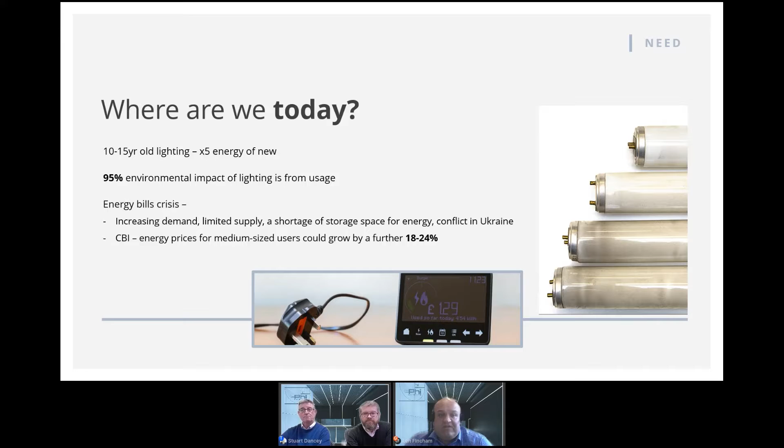Even those companies who are large enough or fortunate enough to have bought forward their energy are now beginning to see massive increases in their costs. According to a recent CBI report, energy prices could be set to grow by a further 18 to 24% in the next 5 years.

Another major change in the lighting market happened in the spring of this year. The EU Commission revised the handling of mercury-containing lamps. Mercury is considered a hazardous substance, and its use in electrical or electronic equipment is being prohibited. By the end of 2023, the production of T5 and T8 fluorescent lamps will be outlawed, meaning that the lamps for millions of luminaires across the UK, mostly in commercial premises, will no longer be manufactured, and the light fittings will soon become obsolete in their current form.

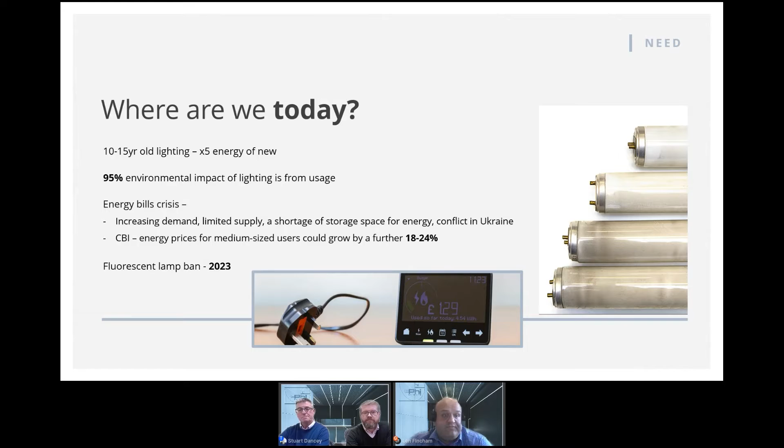For all the reasons mentioned in the previous slides, lighting offers a key opportunity for businesses to save money. But also, a further need to change is the desire of customers and staff to make greater strides towards sustainability and greater overall efficiency. The growing focus on climate change has led to stricter government regulations and legislation, with responsible companies taking a closer look at the impact their actions are having on the environment.

However, many organisations claim they are committed to operating in a sustainable manner for the betterment of the communities in which they operate, or use such statements as, 'We use sustainably sourced materials.' However, with the broadening reach of social media and the scrutiny that can easily be levelled by any number of ecologically minded watchdog groups, it is increasingly critical that such promises amount to more than just words on paper.

Design teams need to be incentivised not just to specify low carbon materials, but to identify and design holistically an overall low carbon solution. The UK government has enshrined in law new targets to slash emissions by 78% by 2035 and to achieve net zero by 2050. Demand drivers such as these, and the UK government imposing requirements to demonstrate the embodied carbon of their buildings, are already encouraging the building industry to move to the next level.

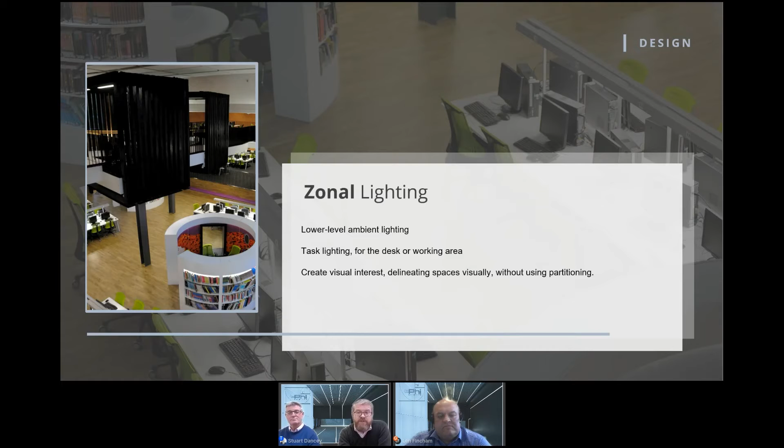Spaces can further be defined through creative choice, such as the fitting aesthetic, the finish colour of luminaires to denote areas or zones, or through correlated colour temperature, actually using the colour of light to delineate spaces.

If, however, the project is still at a Cat A stage, and we can't always get away from this, it doesn't allow lighting design to maximise all the potential benefits we've discussed. In this scenario, the best approach is to design using a fitting with modularity at its core that will allow future adjustments to optics, gear trays, and layout configurations with minimal impact both in costs and luminaire replacement.

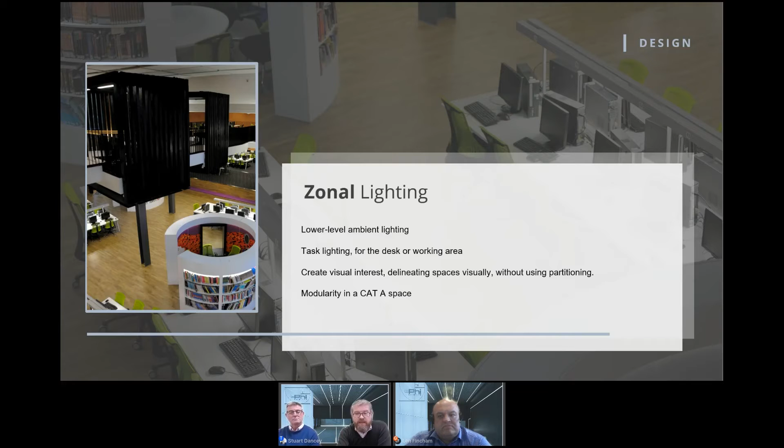We've all experienced poor lighting design. However, inadequate lighting can have negative well-being consequences, extending past just eye strain and headaches. More studies are linking the negative side effects of poor lighting with issues such as depression, anxiety, seasonal affective disorder, as well as reducing the quality of occupant sleep and contributing towards obesity.

We expect to see an increase in the adoption of lighting for employee well-being. Tunable white fittings allow for colour temperature and intensity of light to be adjusted throughout the day to support natural circadian rhythms of the occupants within the space.

Supporting natural rhythms will help improve sleep cycles and will help employees' overall health and immune systems. In turn, a healthier workforce helps reduce sickness and absenteeism and improve overall productivity.

Task lighting can help lower power densities, energy and carbon. However, when linked to smart control systems or via local sensors and switches, we have the opportunity to make the lighting user configurable for added control and local visual comfort.

The control of the colour temperature, direction, and volume of light can all be easily altered from one user to the next to accommodate individual preference. Seeing should be effortless and intuitive, and we all have personal acuity preferences that no specification can truly cover.

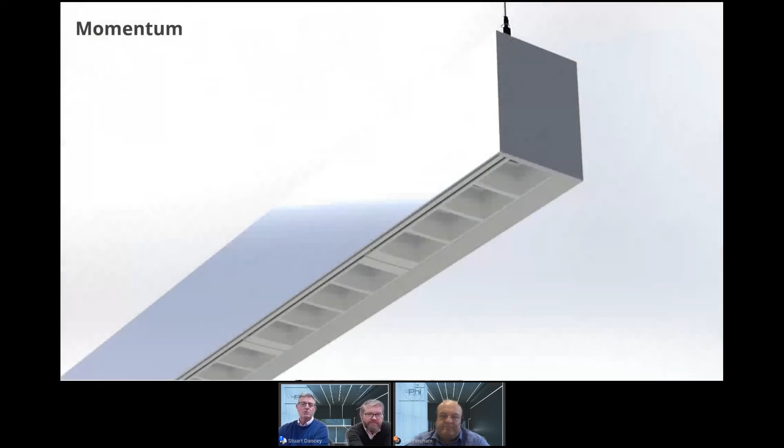The lighting system incorporated at OGW is Phi's linear extruded Momentum, which has a strong story to tell in terms of efficiency, modularity, and sustainability.

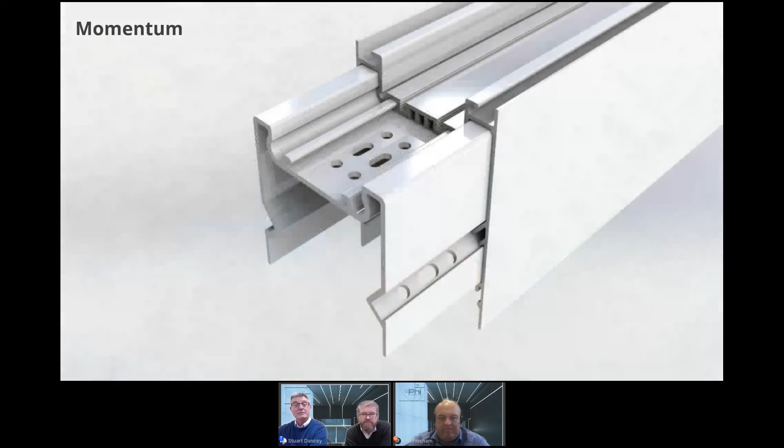This advanced solution is highly adaptable to project requirements, significantly exceeding current performance guidance. Even so, space usage can change, for example in the short term due to Cat B fit out, and in the long term due to occupier business evolution, both of which can cause the lighting to fall out of step with requirements.

In these situations, refurbishment stasis can be caused by the high capital expenditure of complete replacement, time and disruption. But by designing a modular system, we aim to provide future flexibility, allowing the lighting to quickly, easily and less expensively evolve as the space changes.

The outer housing remains consistent and enduring, allowing for modular gear trays, carrier optics, blank infill sections and integrated sensors to be configured to suit the project requirement or later replaced to enable adoption of future technology.

Striving to use the most efficient LED light sources will maximise the lumen efficacy of the fitting, reducing overall fitting wattage and lighting power density, thus reducing energy bills and carbon footprints.

A clear optical carrier system allows a wide array of technical optical materials to be incorporated or later swapped to meet specification requirements. These include opal, microprismatic, CDP or pocket optic solutions.

As an extruded and die-cast aluminium system, end-of-life recycling ensures minimal material waste reaches the landfill.

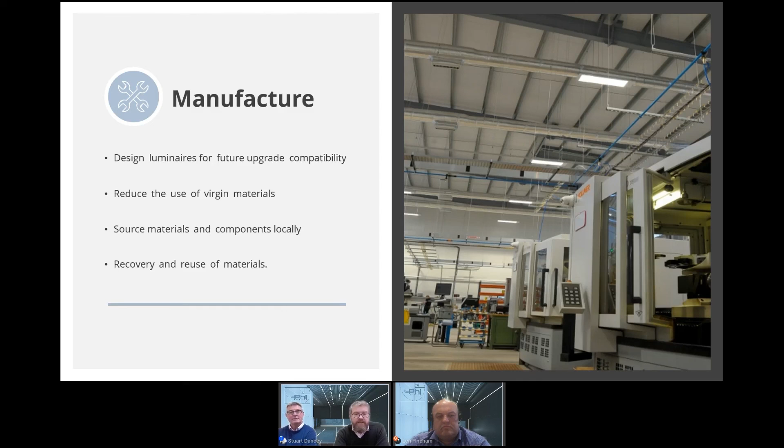Fittings will be manufactured with a higher percentage of recycled materials, reducing the use of virgin materials and single-use components. With time, there will be an industry shift to source materials and components locally to reduce embodied carbon within fittings wherever possible. And finally, there'll be a recovery, reuse, and redistribution phase of previously recovered materials or components to be repurposed into new fittings.

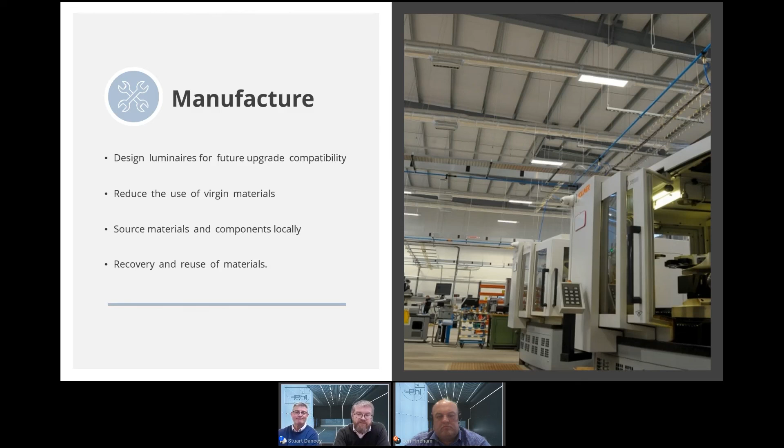During the service life of fittings, the focus moves to maintenance. LED fittings require minimal maintenance compared to traditional lamp technologies, excluding emergency battery replacements. Assuming the first components to fail will be the capacitors within a driver, this gives a mean time between failure of circa 50,000 hours, and a fitting service life between 5 to 10 years depending on operating hours. Benefits of fewer engineer visits and workplace disruptions are clear to see.

Unexpected failures do occur, and fittings engineered for easy assembly and disassembly reduce the time required to perform maintenance tasks. The use of quality branded components offers assurance, extending service life, but at an increased cost. It also ensures component availability or succession, so maintenance can be undertaken at a later date. Benefits from extended warranties are possible to cover the performance of products supplied in their reuse phase.

And at the end of service life, or when the space has changed its use, LED fittings can be refurbished or upcycled. Rather than disposing of fittings, reverse logistic networks will be called upon for the recovery of fittings back to the manufacturer or operational centre to undertake the refurbishment. Fittings will undergo repair and refurbishment, upgrade for reuse, or complete fittings or redistribution of components for reuse.